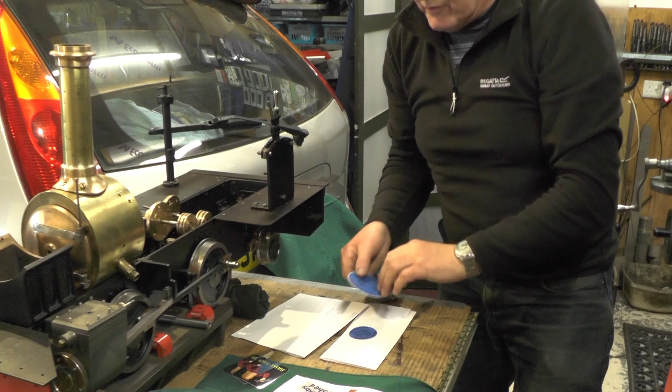I didn't show you Julie's Shed one, did I? That's Julie's Shed. And then again, I didn't show you Paul, that's Axby's Shed. So I'll get these up on the sticker board, you three, and I'll take a look over there.

Every now and again I get a message asking what's them engines in your windowsill, and I never get round to showing them. So for anybody starting out in this game, you'll find that castings, drawings even, and materials in general are quite expensive.

But I'm going to be honest, I made them with no drawings. Well, I did use a drawing, but the drawing was free. I'll show it you in a minute.

I made them from basically just bits and pieces that I had lying around my workshop, and I've not bought anything for them. So if you feel as though you've got limited scope for buying castings and things like that, you don't have to. Just use whatever you've got.

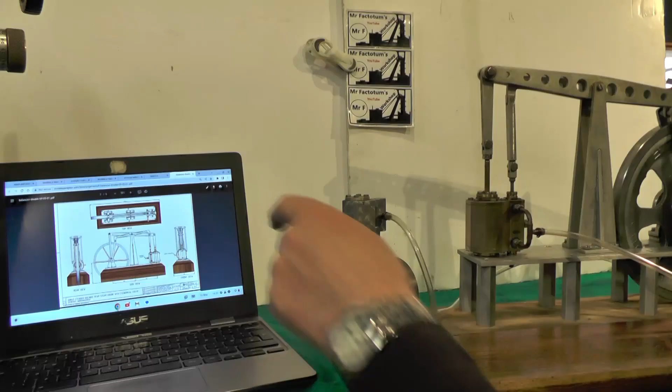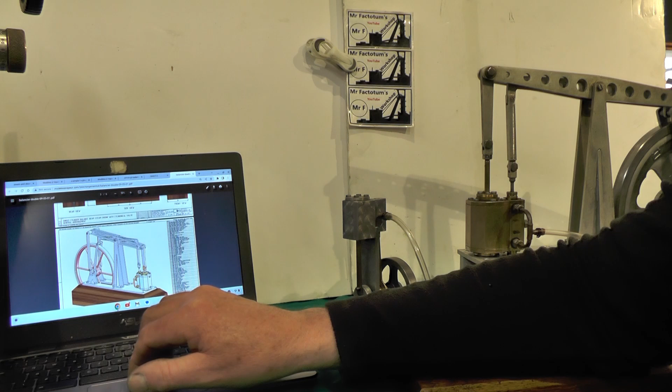This is the drawing I made this to, and it's by J.A.M. De Waal from New Zealand. I think he calls himself, I've read it somewhere, JDW Drafting Services. I've seen it somewhere, but that's the drawing that I downloaded off his website to make it.

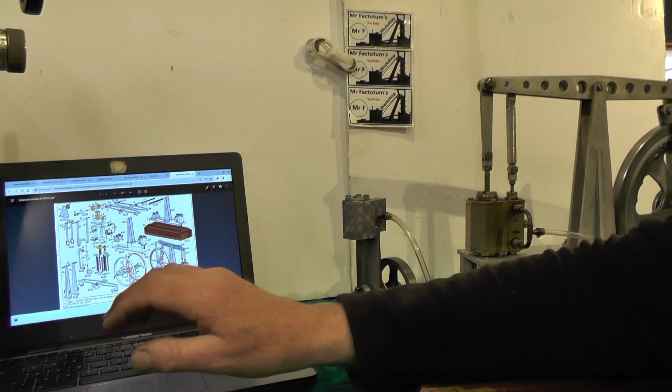I know it looks quite involved on there, but take that wheel for example, that flywheel - I made it from a, what diameter is it? An 8-inch, is it 8-inch? No, it's 10-inch, I made it from a 10-inch pulley. I just turned the V off the pulley, and then I shrunk fit a piece of steel on the outside to make it look as though it were a solid wheel.

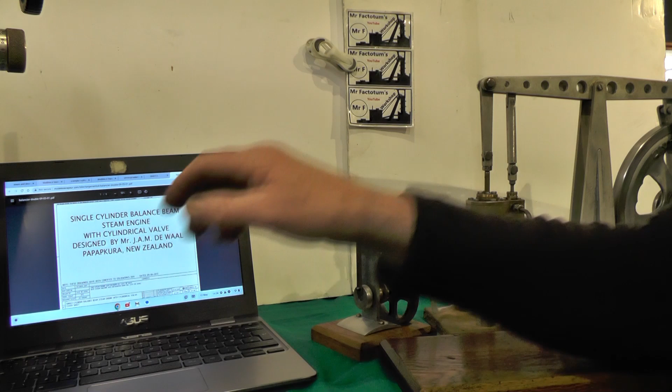So yeah, you can do all these using limited materials really, just what you've got lying around or from your Model Engineering Society or whatever. So that's that one, and then this little one here, this is a vertical single cylinder engine.

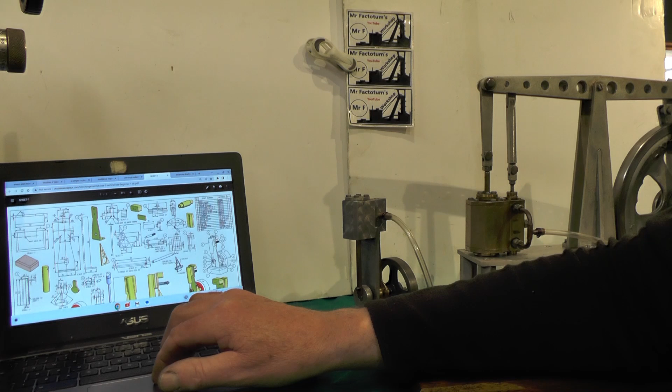He's got loads of these that you can make. He's got a beginner 1, a beginner 2 and a beginner 3. I think they're wobblers, I think they call them wobblers, but this is a piston one, a single cylinder piston. So if you just click on number 1 then there's just one sheet to do, and that'll get you that one made in no time.

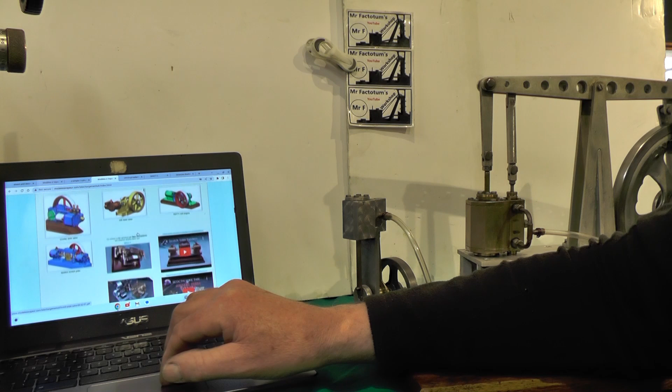Then if you look a bit further down, there's various 3-cylinder, 2-cylinder models, radial models, vertical, horizontal, you name it, they're on here. Then we get down to more complicated ones - is that mine again, that one, look. Now that one looks complicated, an 8-cylinder something or other with slide valves, and that's this one. So yeah, they're all there to download and use.

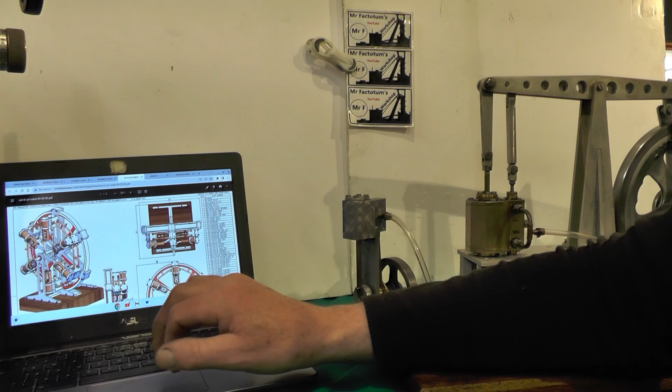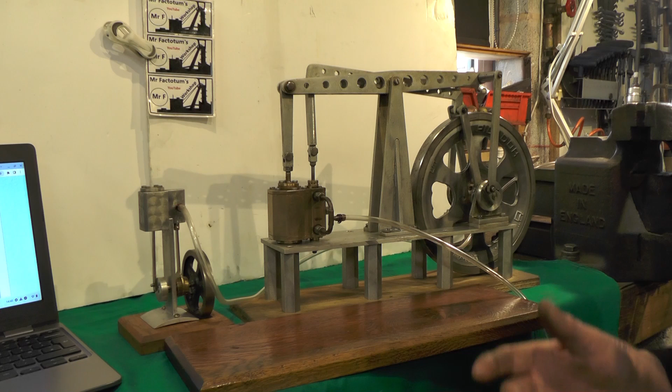Right, let's have a look at these in motion. So basically then, for all the people that message me, email me and ask me what's them engines in your windowsill, that's them. All cleaned and dusted down now, just want painting and finishing off. I'll put the compressor on and we'll have a look at them running.

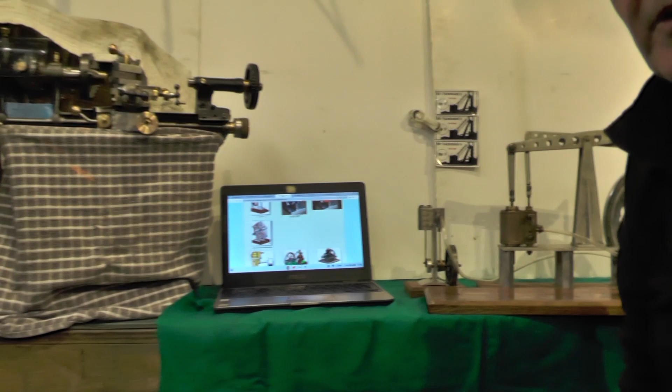And just for anybody that's wondering why I've got my micro lathe project all covered up, it's because maybe this video might come out before I show what I've actually done to this. I'm a couple of videos in front.